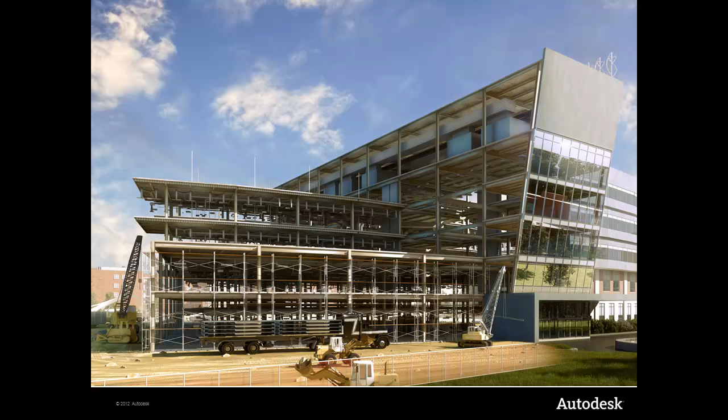Hello, my name is Anthony Governanti, and I am a Technical Marketing Manager with Autodesk, and I am pleased to bring you a brief demonstration of the Autodesk Construction Solutions Multidiscipline Coordination Workflow.

Let's begin with a close look at the components of the Multidiscipline Coordination Workflow. When undertaking the process of coordinating multiple trades for your project, it is important to begin with a solid understanding of the project, its extents, and the quality of the information provided.

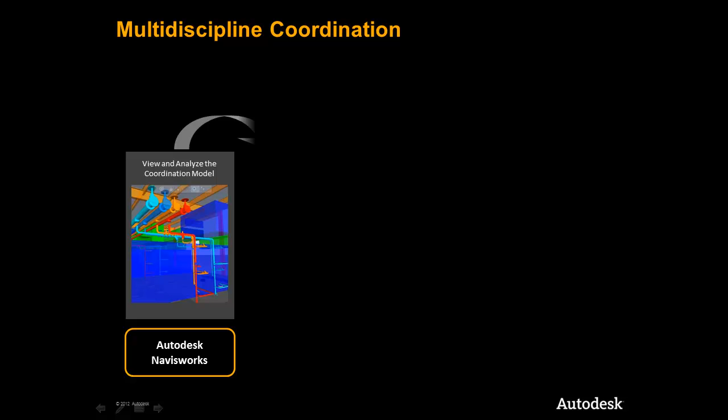We begin our multidiscipline coordination workflow by viewing and navigating the constructability model for our project. We leverage Autodesk Navisworks to do so, which offers construction professionals a comprehensive project review solution, providing enhanced tools for interference analysis and spatial coordination. We can easily and quickly view the multidiscipline models to see if there are any obvious problems, then move into using analytical tools to find specific clashes.

An important aspect of the Autodesk construction solution is not just the ability to find the clashes and conflicts within our project, but to manage and ultimately resolve them. With this next phase of the workflow, we will explore Autodesk Navisworks' ability to quickly clash our models and to manage the information efficiently so we can reduce waste, requests for information, and change orders in the field.

With the conflicts found, we will continue in Navisworks to manage the who and what part of the process to assign the conflicts found to the appropriate stakeholders. We will also take advantage of Autodesk Revit to ultimately make the changes to the design in order to resolve the problems virtually before we get into the field, where conflicts and mistakes have the largest impact on our project schedules and costs.

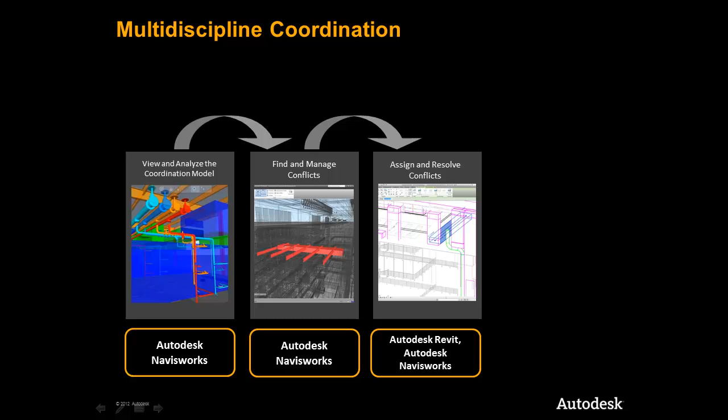The entire process can be tracked with powerful reporting tools that will ensure we have accurate and timely records of who did what, when they did it, and why. To that end, we will show how the Autodesk Construction Solution creates detailed reports of the conflict analysis, including the tracking of problems found through to resolution.

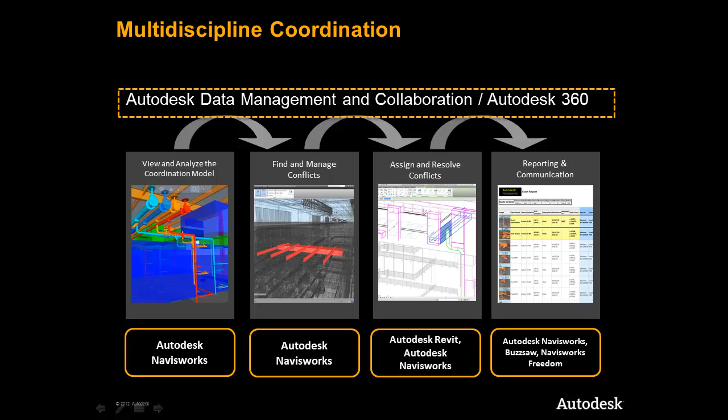It is important to note that the Autodesk Construction Solution ties directly into a data management and collaboration solution that empowers firms like yours to manage, share, and securely collaborate with all project stakeholders, both inside and outside your firewall. As we see in this graphic, the Autodesk Data Management and Collaboration Solution is a connector that links the workflow components together, enabling project information to be shared at any stage of the process.

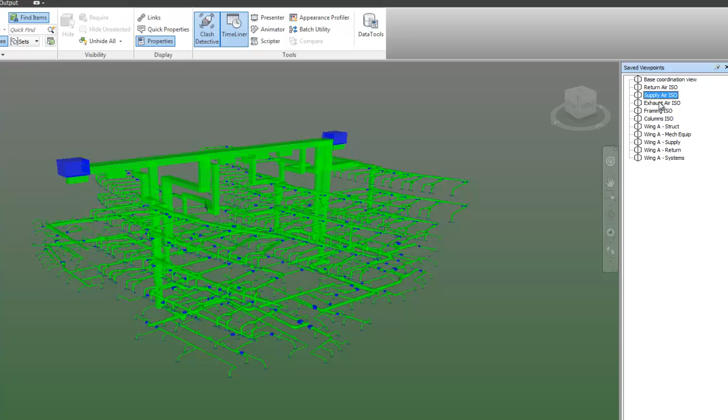Undertaking pre-construction coordination across all trades offers the best opportunity to understand constructability before work begins in the field, and to help avoid preventable RFIs and change orders that can risk project schedules and budget. Constructability models from each trade can be integrated into a single multidiscipline project model, regardless of authoring application. This is a key step to being able to coordinate these disciplines.

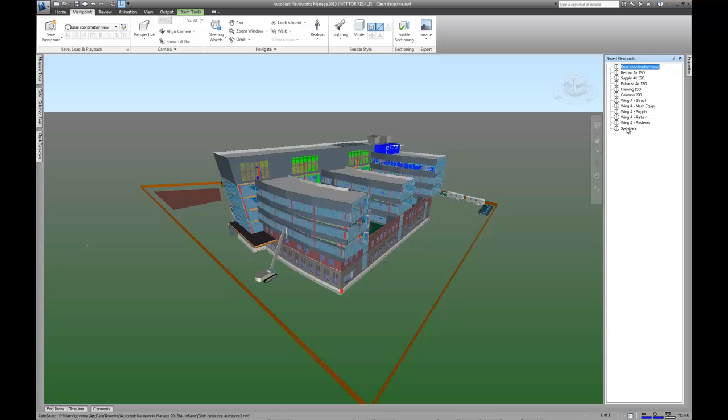By leveraging the constructability model, we can get a whole project view of the coordination issues at hand and begin to take steps to eliminate them by taking advantage of the work already done to create a model with construction intent. Here we can see that just a visual check shows there is a problem with the sprinkler system, and that we see part of the system outside of the building envelope. We can make a note of the problem that is shared with all project stakeholders and can be assigned to the appropriate party for resolution.

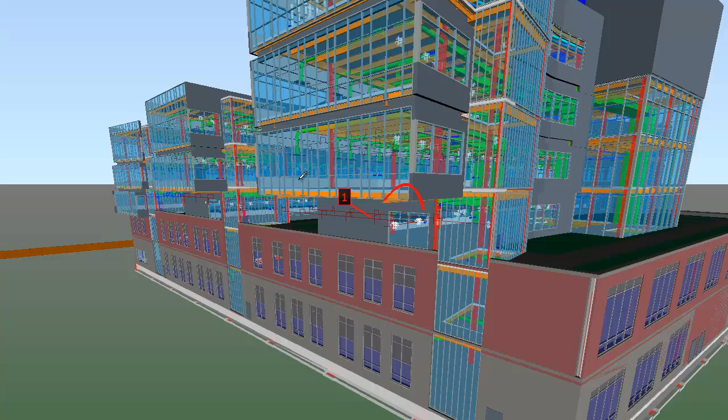The traditional coordination method involving overlaying 2D drawings on a light table is extremely time-consuming and unsurprisingly prone to many conflicts going undetected until encountered in the field. When you bring together design data that has largely been developed in isolation, issues can be expected. While coordination practices currently exist using 2D paper drawings, using a model-based approach enables a more efficient and robust digital process where you can visually see the issues.

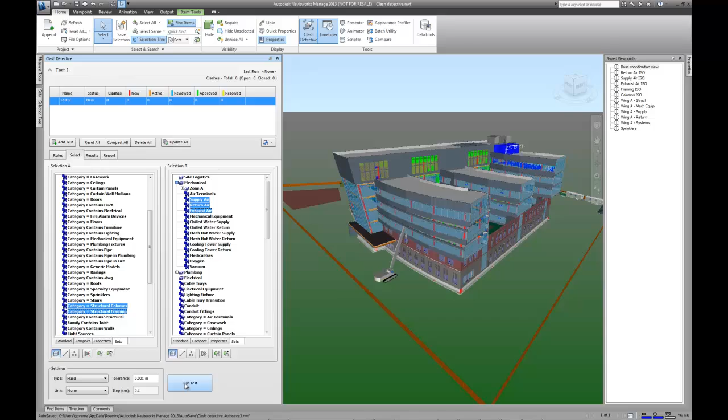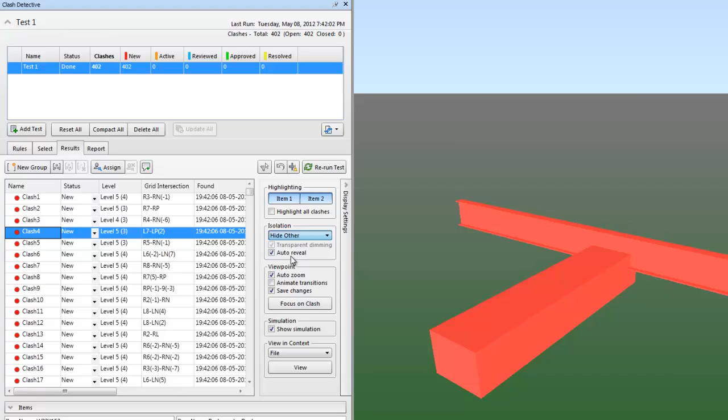The project model can then be analyzed for cross-discipline interferences, be they conflicts with HVAC systems and the steel structure, or adequate clearances around the fire protection sprinklers. Here we can see that a macro-level clashing of the systems and project components can be done. We can also follow our work breakdown instructions and leverage the area and zone schemes established for executing the work. We see how issues can be visualized more clearly, reviewed in a collaborative way, and assigned for follow-up actions.

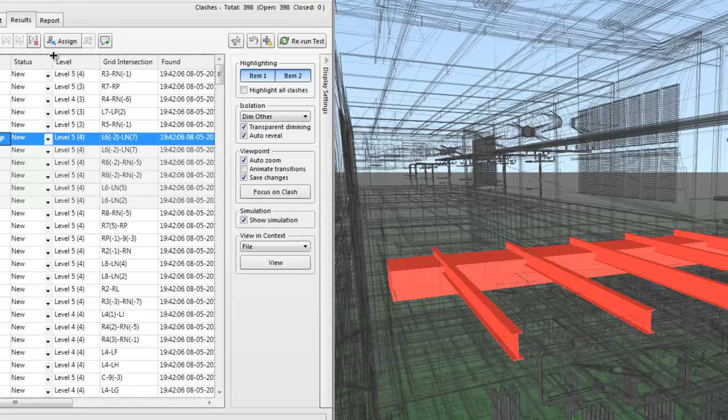Once a whole project view is understood, we can then move into a micro-level coordination, where we leverage detailed views of the model and get very specific on which elements are coordinated, and that the coordination is done in a logical and deliberate way, ensuring accuracy. The results of micro-level coordination will carry through to the field execution when daily or weekly coordination meetings and tasks are done using the framework and organization of the models done here in the multidiscipline coordination.

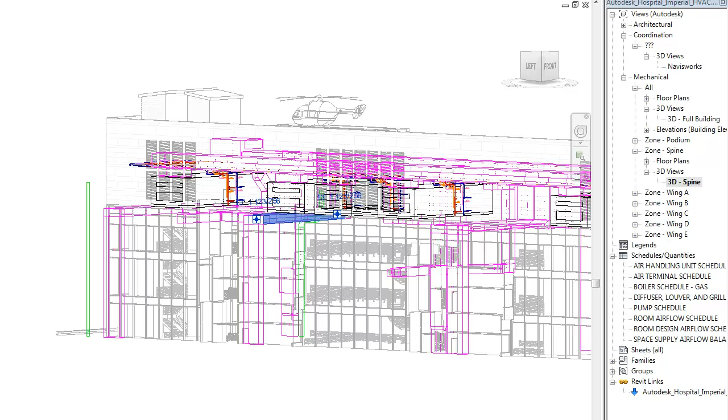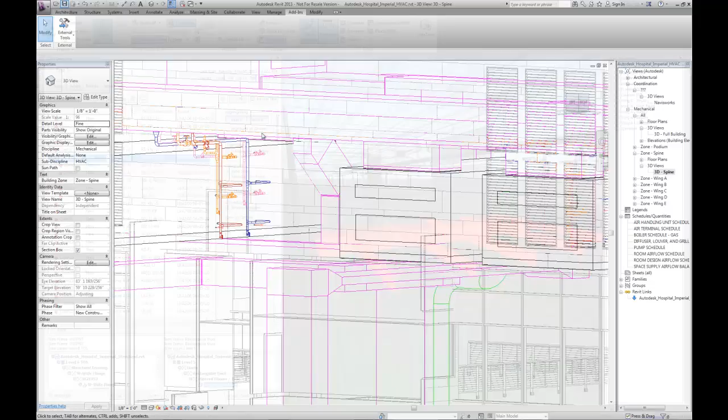As the issues are identified and managed, coordinating the needs and changes with the design or construction models is made easy with tools that group similar conflicts together, review in both 3D and 2D, and can switch between the single construction model and the originating design model. Here we see that we easily group clashes for one building component together, assign them to the appropriate stakeholder, and easily switch to the design application where the conflict can be resolved accordingly. This saves time in locating the conflicts and ultimately streamlines the workflow for resolving them.

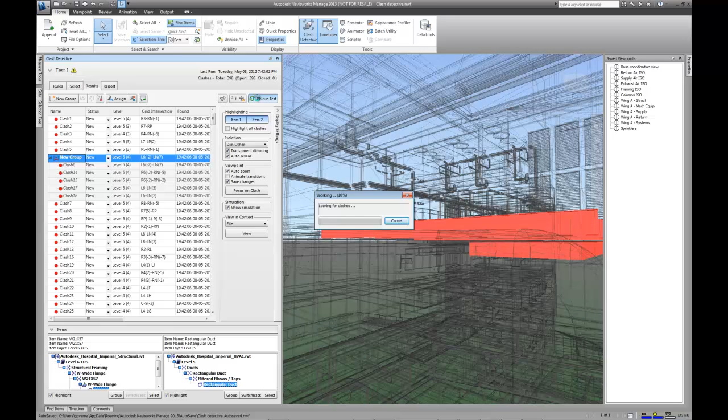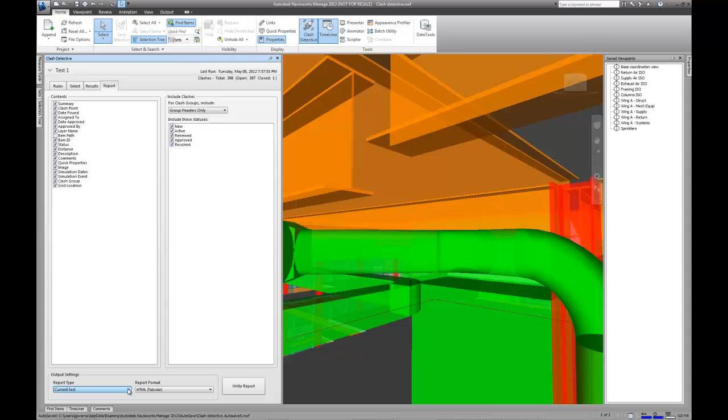We can also collaborate with distributed teams by sharing the relevant information in a controlled and secure environment, leveraging the Autodesk Collaboration and Data Management solution. This enables easy communication of issues and synchronization of subsequent changes across the many team members and locations. Using the Autodesk Construction solution and a model-based approach for coordination and analysis for multiple disciplines helps determine whether the various designs fit together and provides the opportunity to resolve any conflicts during the planning phases when there are no materials, equipment, or field labor costs involved.

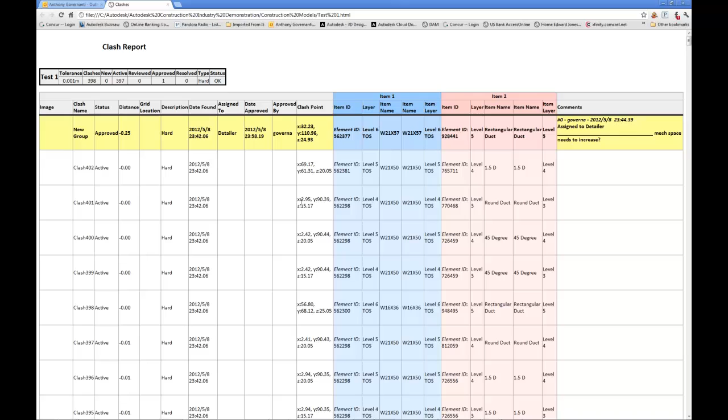The Autodesk Construction solution provides a powerful and consistent framework to coordinate all disciplines involved in the BIM construction workflow that leverages an open platform to ensure all the appropriate project information is available throughout the entire coordination workflow.